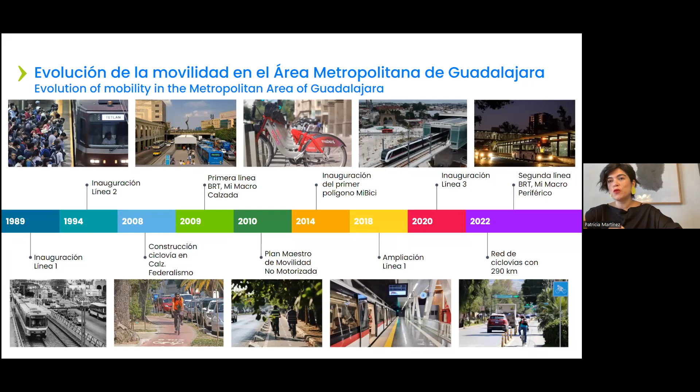2010 was a very important year because the active mobility agenda started to become a priority in the city, and this became the first master plan for non-motorized vehicles in the metropolitan area. This is the first agreement between government, civil society, and academia, and it's the agreement we follow for our active mobility policy.

In 2014, we started the public cycling project, the MiBici project, which entailed a very interlinked partnership between different actors. I'd like to highlight that from 2010 to 2014, there was a void for investment. However, in 2014, the mobility agenda started gaining more strength, especially for cycling infrastructure.

In 2018, we see an expansion of line 1. However, we started to see more investment in public transport in 2020 when line 3 is inaugurated. Line 3 is a route that connects the municipality of Zapopan to the municipality of Tlaquepaque, going through the municipality of Guadalajara. So line 3 connects 3 main points, 3 historical points of the 3 cities.

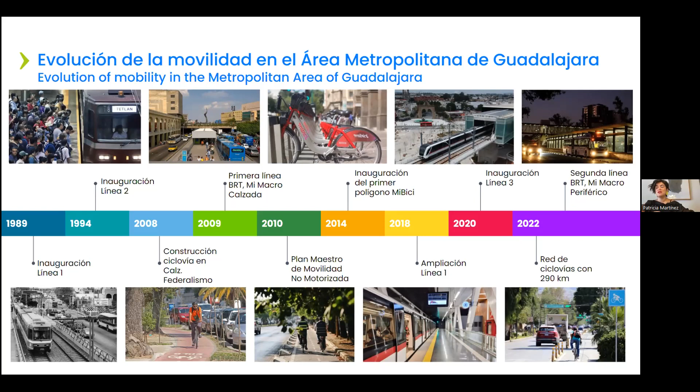Thanks to that, we have been able to consolidate a 290-kilometer network of cycling infrastructure.

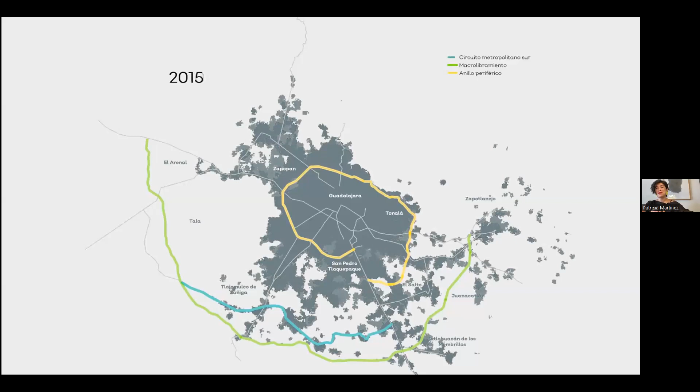Guadalajara has gone through the urbanization process like many other cities. You can see on the screen how it has grown since the 60s, when we were still within the yellow ring, the Periférico, which was seen as the main road or highway for the city. But after that, the Periférico became part of the city. It started to be in the middle of the city, and instead of a highway, it became a roadway for freight transportation.

What is the main problem we were able to identify in this area? Of course, we have the unmanaged, uncontrolled urbanization, people who came to live in this area, and there wasn't very good connectivity. So the Periférico became the way they connected to their workplace, to the service centers.

There was an increase in motorization rates as well, because we saw more urban infrastructure and people started using their cars even more. At the time, public transport wasn't enough to satisfy all the needs and connect people to their neighborhoods that grew in this uncontrolled urban sprawl.

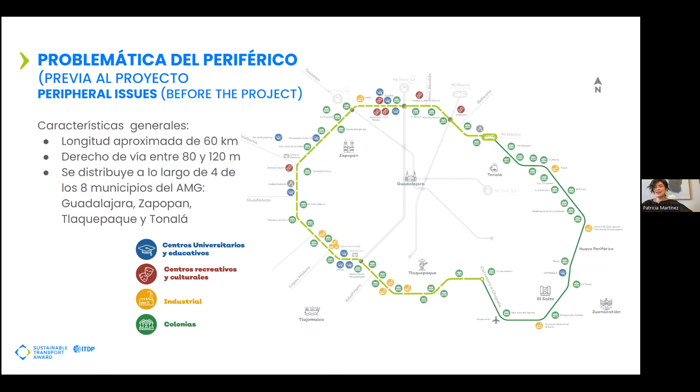It's important to mention that everything we designed for Mi Macro Periférico is aligned with our governance and development plan with a 2030 vision. We were able to work it out on the 4th axis of sustainable territorial development, especially axis 4.1 and 4.2. We really want to build a massive and public transport that is comprehensive and that will also allow us to guarantee more efficient and safer commutes.

Together with this, we'll be able to create opportunities to encourage people to use public transport and not so much their personal vehicles. And now I'd like to give the floor to René Caro so that he can explain in more detail the project Mi Macro Periférico. Thank you.

Thank you so much, Patty. So Patty has given us some background in a very clear way. She explained the historical process and the transformation we have seen in this city regarding public transport, active mobility, and cycling infrastructure as well, the public cycling program, and all the steps we have taken to enjoy the mobility we have today.

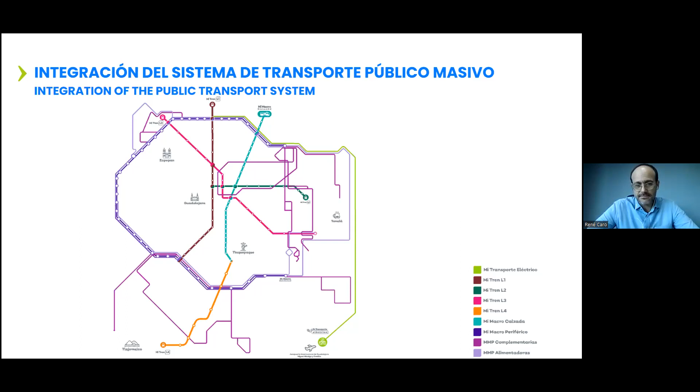And I'd like to highlight two lines. The first, the green line you see to the right, is the first electric line in Mexico, and it supplements the system to the eastern side of the Periférico. To the west side we have line number 4 of the electric train as well, which we are building at the moment and will inaugurate next year. This is the orange line you see running to the south.

So this is the right-of-way of 80 meters that we have. As Patty mentioned, we had a lot of leeway and we were able to add all of the elements we described, and managed to go from an urban highway with 2 roads and a lot of freight transport used to go through, to now this specific 4-road way. So we have lanes for personal vehicles, and we also have the green ring.

You can see we also have 3 lanes, and this green ring, which is sort of like a green walkway, allowed us to also give a new sense to the urbanization. And finally, the lateral lanes allow people to drive at a lower speed, and finally there's the cycling infrastructure, as well as the building of sidewalks and safety and security for pedestrians.

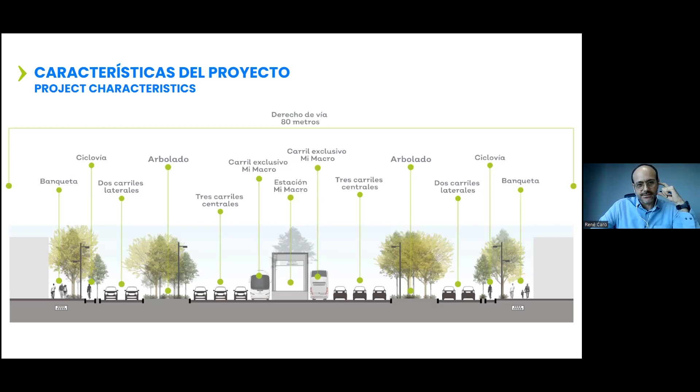And this is the blueprint of the stations. As Patty mentioned, we needed to understand that the stations were the epicenter of many situations that would happen with pedestrians or cyclists. So in this blueprint, we designed...

In these 80 meters, we were able to build sidewalks, universal accessibility, and safety side crossings. And this is how it looks like with its cycling infrastructure, which was very important.

We also have the transfer bays, which are the connecting points in which the buses make their stop and can change lines. So these transfer bays are where people can transfer from line to line, and we can also offer different services.

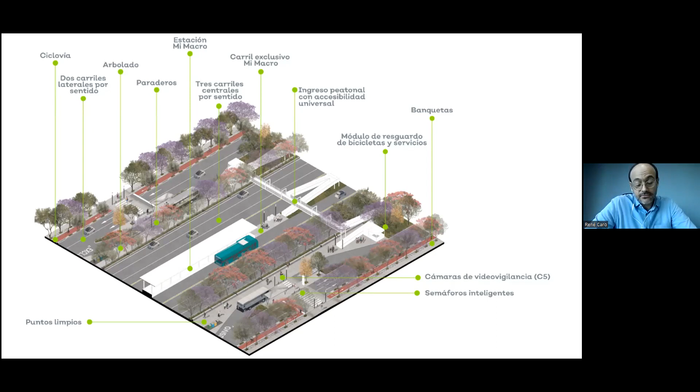So we were able to regain the public space. Sometimes we know that when people are commuting, they might have to wait a long time from one bus to another, or perhaps they are waiting for someone else. So the public design for these bays was very important, understanding first all of the needs of the users and the needs that have to do with security and comfort for the use of the space.

Something very important in the design of this project was the visibility of the system, and we managed to do this through a very interesting project that connected the different neighborhoods. First, we needed to define the name of the stations, and we asked people how they understood their place, how they would recognize the area in which they lived.

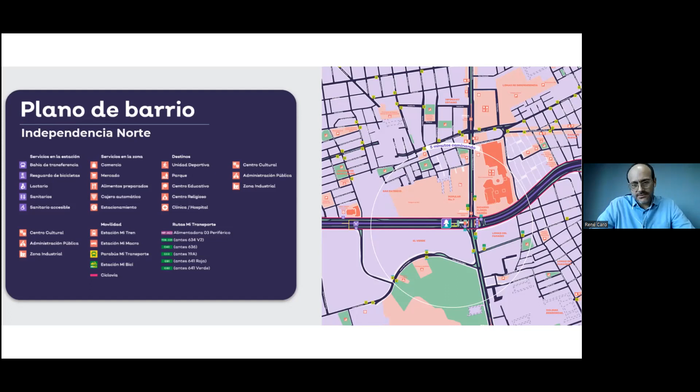This also allowed us to strengthen the network of Mi Macro Periférico with the other BRT line systems and conventional and traditional transport lines. We took all of that into account to provide a safety service, and this has been one of the most positive aspects, because we also took into account the elderly, how they can plan their route so that they can take the safest way and make sure mobility will guarantee safety to their destination.

These are some photographs of the project already built. This is one of the transfer bays we were able to build. We see the sidewalk, the lane, and the cycling lane as well.

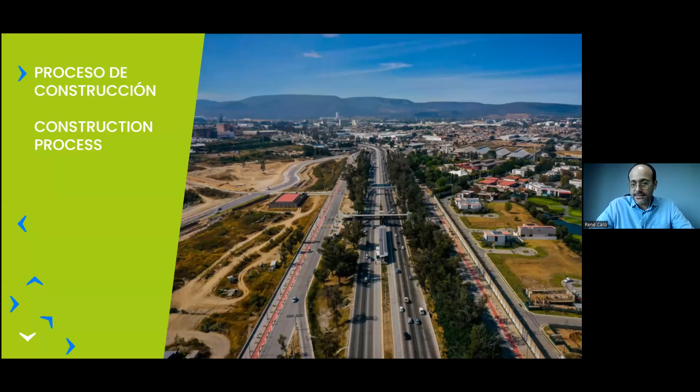A very important element in the negotiation was the specific characteristic of Periférico in the construction process. It's a very busy lane, and that's why we needed to recognize that Periférico needed to operate in spite of the construction.

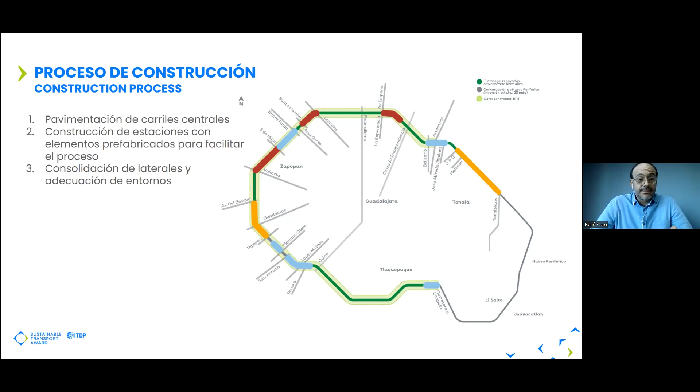That's why we needed to make important decisions, for example, working nights to close the main lanes so that we could pave them. Once we had the center lanes free and paved, we would close the side ones so that we could build the stations. We knew we didn't have a lot of time to invade the other lanes with the building process.

So the station building took into account all of the materials so that it could be assembled in a warehouse, and at night we would just bring it in and put in the stations. Once we had the stations, we started with the lateral lanes, and this was very challenging.

As you can see to the left side, it was new. We didn't have side lanes in Periférico, so we needed to not only pave the road, but also build in all of the infrastructure that has to go underground. This was a very technical challenge that we managed to overcome.

Thanks to the side lanes, we were able to solve the traffic problem we had. We had these bottlenecks, and now thanks to these lanes, we were able to make it flow a bit better. We also have the cycling lanes and, of course, the sidewalks for the pedestrians.

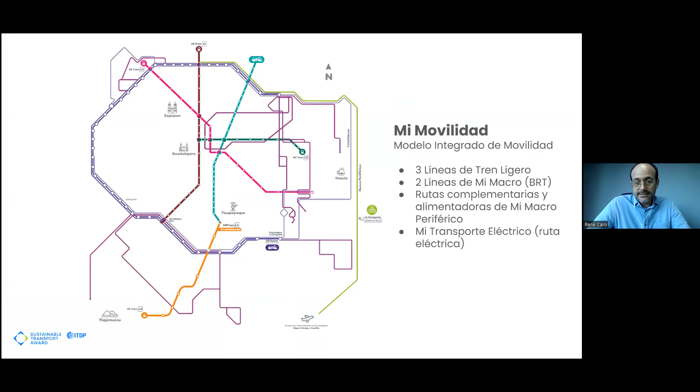So what are the outcomes of the project? I would say that today we have a stronger network for mobility and transport in the city. We have 3 electric rail lines, 2 BRT lines as well, and complementary routes and feeders of Macro Periférico, as well as the electric route to the east of the city.

One year after the operation, we have 90 million trips made. We have over 300,000 daily trips. In the first year, we set the record with over 300,000 daily trips. This also allowed us to have a 20% savings in travel time for our users.

This higher demand than we expected in our planning also made us add more units and buses for the main routes, so we have 18-meter buses for that.

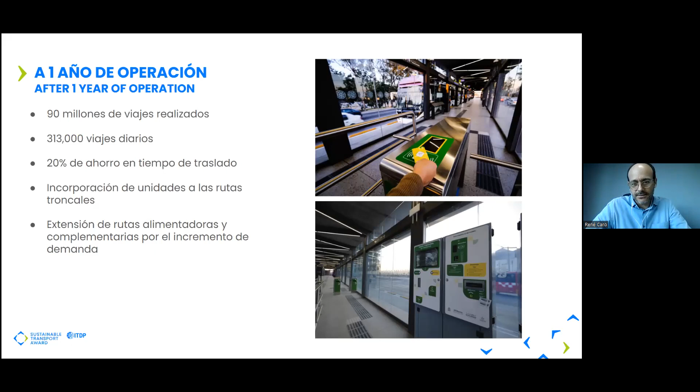Now we see the need to have more complementary and feeder routes due to increased demand, so we are thinking of this extension, especially in the Zapopan region.

These are more photos of the infrastructure already built, so you can see the rails and ramps through the bridges. There are also elevators, so it's very inclusive. These are the transfer bays. You can see the access to the stations and also a recycling waste system where people can throw away their garbage. There's also changing rooms for babies and families.

We have biking parkings.

So these are the 18-meter buses that we are also operating. And this is the access to the stations.

The stations are operating, and all of the stations have solar panels. That's something I forgot to mention, so it's sustainable energy that is being used. And this is another station. Those are the stations that were built in warehouses and brought in at night.

So what are the next steps? What are we doing at the moment, and what will be the next steps for consolidating the mobility and public transport project? So we are building a new line, number 4. This will be an electric line, and it will start operations in the 2nd semester next year.

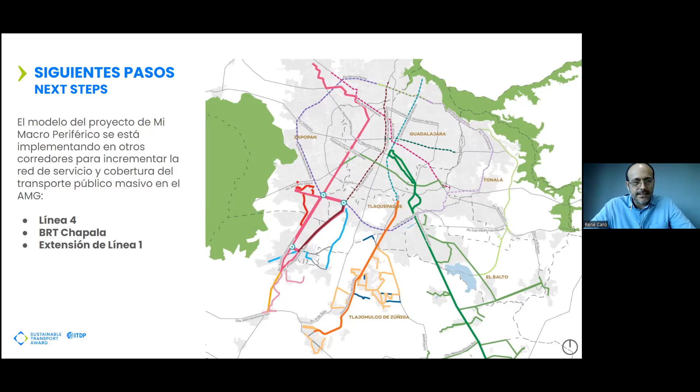And finally, to the south, we see a red line, which is the extension of line number 1. There's also an extension of line 3. It's not on the slide, but we are working on the extension of line 3 in the municipality of Zapopan, which is to the upper left of the map. So as you can see, we continue to strengthen the network of public transport and mobility in the city.

And this is the end of my presentation. Hopefully it was useful to you all. And if you have any questions or comments, let me know.

Gonzalo, I don't know if you'd like to start. Yes, thank you so much, Rene.

It was a pleasure to listen to you and Patty about this project. I would like to commend you because it's truly a project that can be an example, and you can see it with the results. You had increased demand, and in Mexico, not in Mexico City but in other cities, the demand wouldn't go up. It would just stay in the middle of what we projected in the planning. Here you have a very successful case because you have increased demand only in the first year. So congratulations. We can see that the planning and the implementation process were very well thought out, and you mentioned it's the longest line of the country.

So with this, I'd like to raise the first question from the chat, from Doreen Duncan. It has to do with how we started the presentation. So we have Rene, who works for the state and oversees the work of the transport ministry, and Patricia Martinez on the other side, who works at IMEPLAN and has a lot of connectivity with other cities and mobility. So who was the implementing agency for this transportation infrastructure? We have city government, state government, and IMEPLAN, which is not recognized by the Constitution in Mexico.